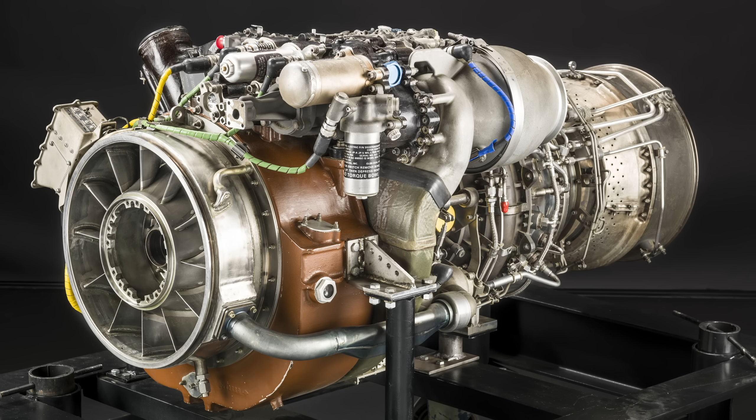The General Electric T700 is arguably the most successful turboshaft engine ever created. It powers a variety of helicopters like the UH-60 Black Hawk, the AH-1Z Viper, and AH-64 Apache, among about a dozen more aircraft types, with the most advanced variants like the CT7-8A7 producing up to 3,000 shaft horsepower.

We're going to examine this engine's design and some of its unique features that allow it to operate in dust, sand and snow with minimal performance loss or damage, and reveal why this engine is still relevant today, more than 50 years after it was first run.

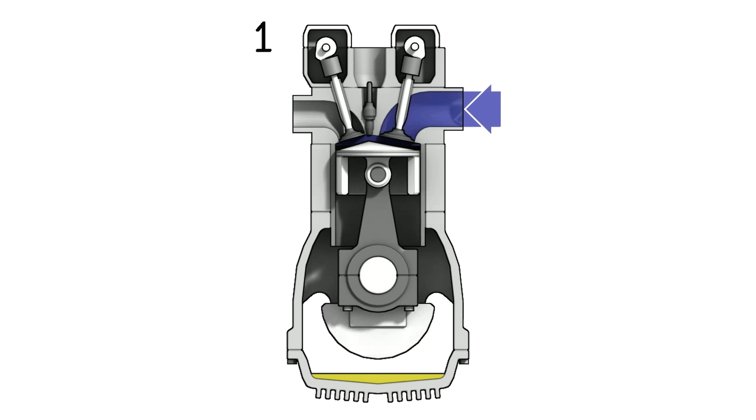Before getting to the T700's design, let's do a quick recap of what a turboshaft engine is and how it works. Understanding this standard design will help emphasize the advanced features of the T700. Like a piston engine, the turboshaft has 4 phases: intake, compression, combustion, and exhaust. Each phase happens in its own section of the engine.

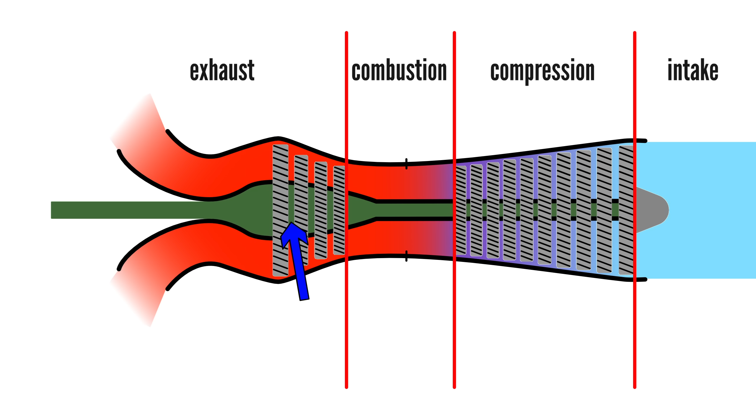Air is drawn in from the front by the compressor rotors. The air is pressurized, which heats it, then fed to the combustion chamber where fuel is added and ignited. As the hot, rapidly expanding gases exit, it spins a turbine. The turbine spins the compressor to keep the cycle going, but also drives the output shaft, which through a series of reduction gears spins the helicopter's rotors.

While I think my extremely high-tech and immersive 2D graphics do an okay job at helping visualize concepts, at times like this I often wish I had a real engine with me here to reference.

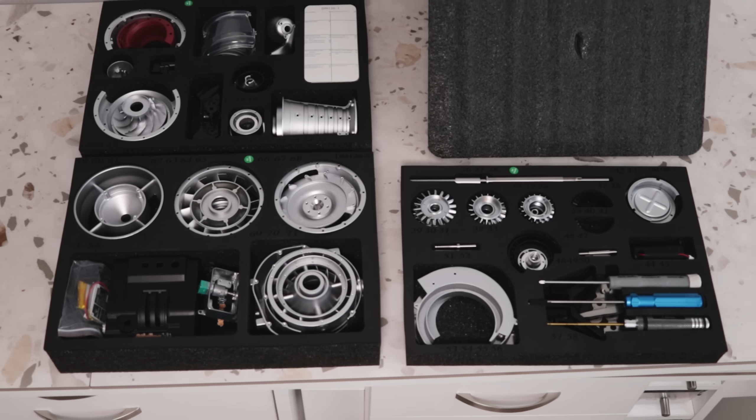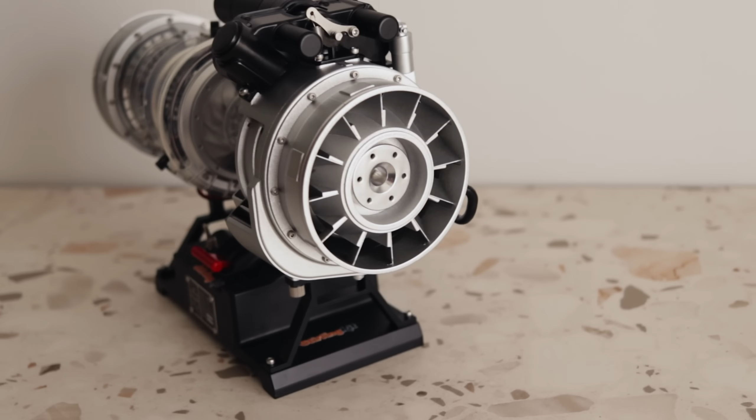So, looking here, you'll see several things not captured by my previous 2D illustration. Starting at the compression stage, you can't see the rotors looking in from the front thanks to something very interesting at the intake, which we'll get back to in a bit.

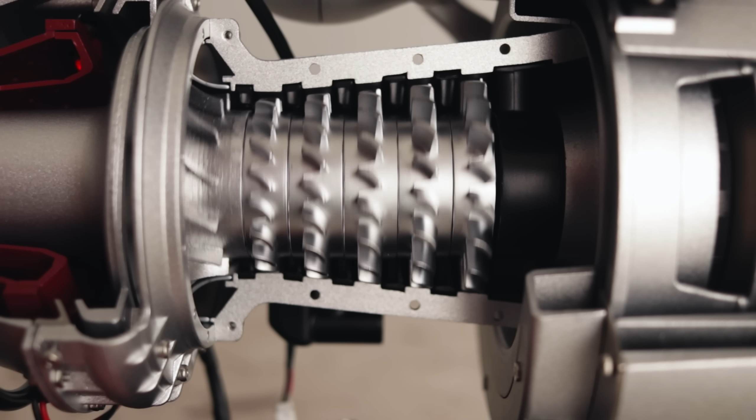Before air enters the compressor, it goes through a variable inlet guide vane, or VIGV for short. This controls how air enters the compressor and helps the engine adapt to different operating conditions. Air then enters the compressor, and the T700 has 6 stages of compression, with each rotor counting as one stage. The overall pressure ratio is 17:1.

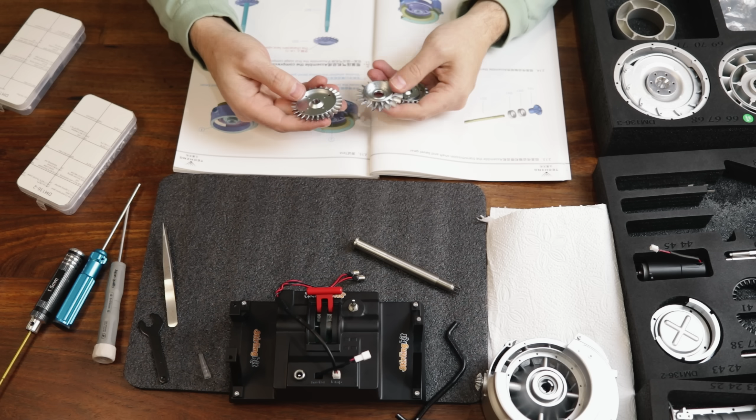Each stage compresses the air a bit more and moves it axially, that is, this way. These rotors are one-piece blisk rotors, exactly like shown here, meaning the blades aren't attached separately. The entire rotor is constructed as a single piece.

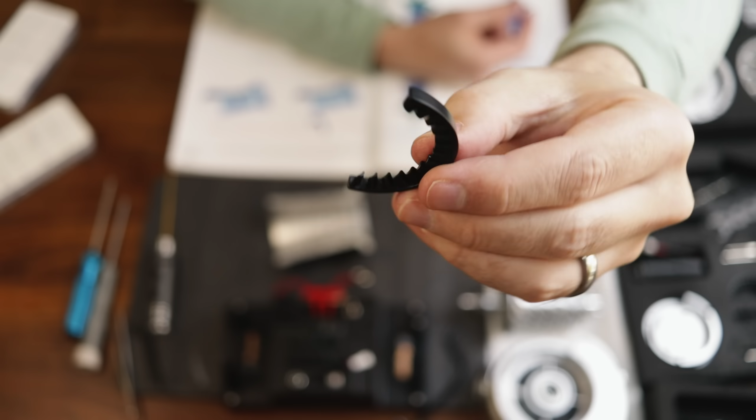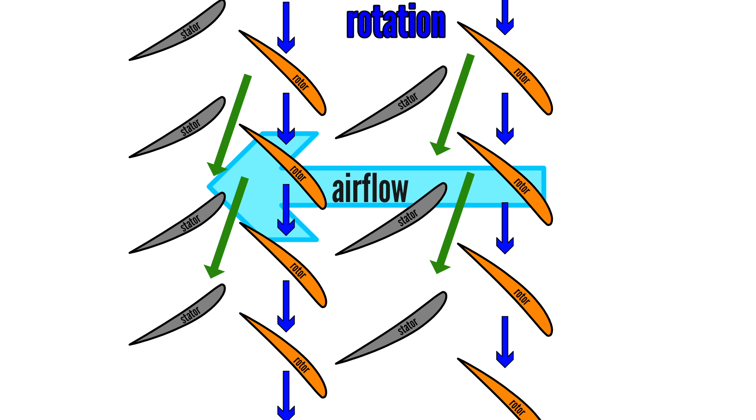In between these spinning rotors, we have variable stator vanes, which are fixed to the casing and don't spin. The purpose of the stator vanes is to adapt to changing airflow conditions, and the blade angles are changed via an actuator shaft. This assists with more efficient compression, with the rotors adding energy and the stators modifying the airflow for the next rotor stage.

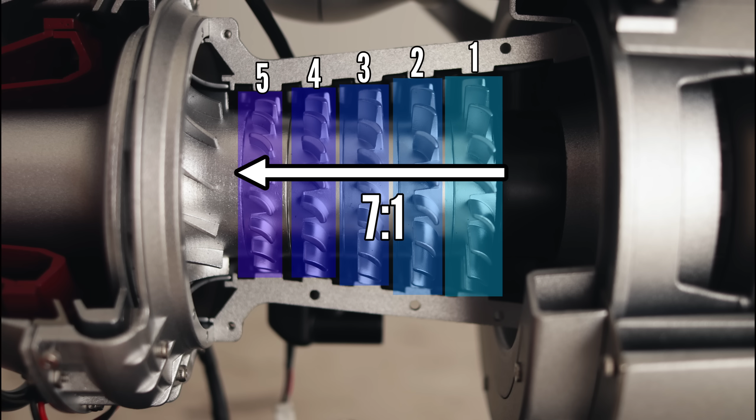This is called an axial compressor, and the 5 axial stages account for a 7:1 pressure ratio. But you'll have counted only 5 rotors, and I said this is a 6-stage compressor. That's because the 6th and final stage of compression uses a centrifugal compressor, a design not much different from what you'll find in your car's turbocharger.

This is an impeller with curved blades that, as it rotates, accelerates air outward through centrifugal force, further pressurizing the air before it enters the combustion chamber. It brings the total pressure ratio up to 17:1, meaning the centrifugal stage alone contributes a 2.43:1 pressure ratio increase.

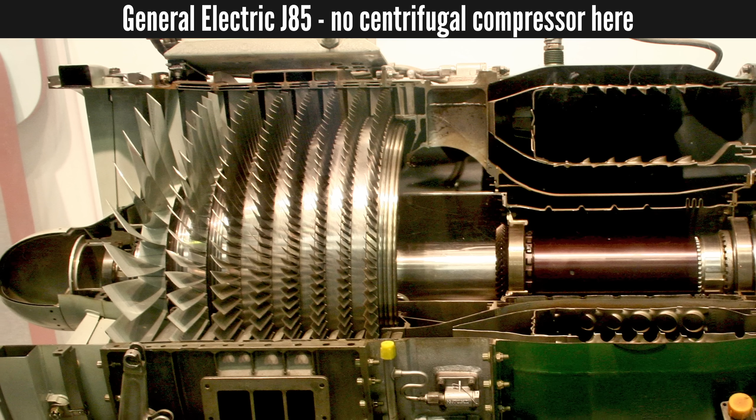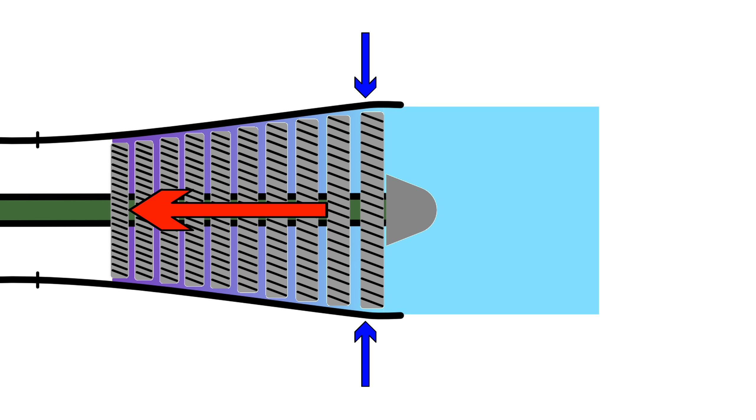Not all gas turbines use centrifugal compressors, since axial compressors can handle higher air mass flow rates, have a smaller frontal area, and can achieve higher overall pressure ratios, making them more efficient. So why does the T700 use 5 stages of axial compression followed by 1 stage of centrifugal compression?

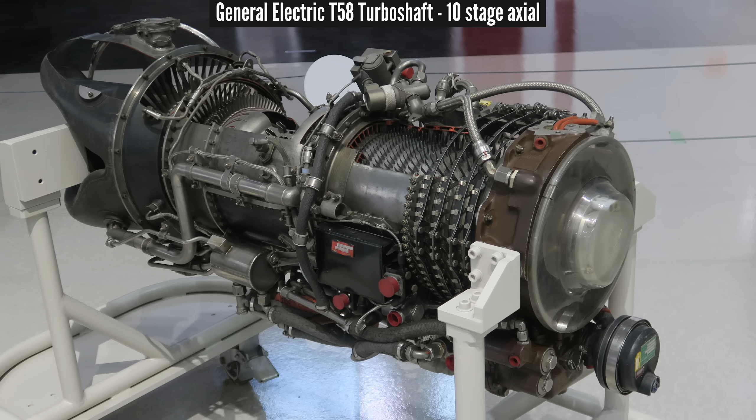Simply put, to get the best features of both. Even though axial compressors can achieve higher pressure ratios, they achieve less pressure increase per stage, meaning they usually need at least 10 stages, making the engine very long.

So instead of using 10 plus stages of axial compression, combining 5 axial stages with 1 centrifugal stage makes the engine much shorter. Critically important for the helicopters it powers, while also bumping total pressure ratio up to 17:1.

It's also worth noting that centrifugal compressors handle power surges better than axial compressors. Keeping some stages axial maintains better overall efficiency, since using only centrifugal compressors would drastically lower efficiency.

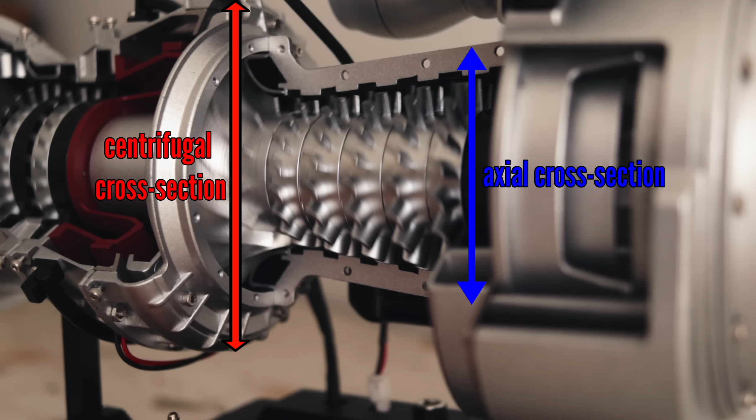Another disadvantage of centrifugal compressors is their large cross-sectional area. But since helicopter engines are usually at least partially hidden in the fuselage and don't create a critical drag penalty, this larger cross-section is less of a disadvantage.

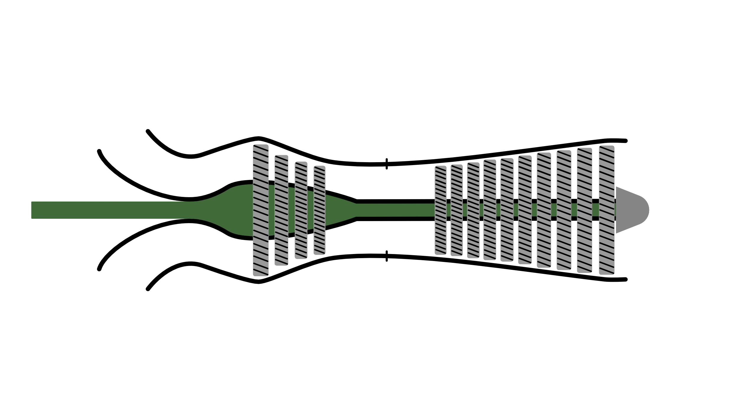Because of the centrifugal compressor, air doesn't just flow straight rearwards into the combustion chamber like in conventional designs. Instead, the T700 uses a reverse flow annular combustor. Air flows outward from the centrifugal compressor, makes a U-turn inwards, then flows around the outside of the combustor and enters the combustion chamber through the diffuser holes where fuel is added and ignited. The hot gases then exit rearwards towards the turbines.

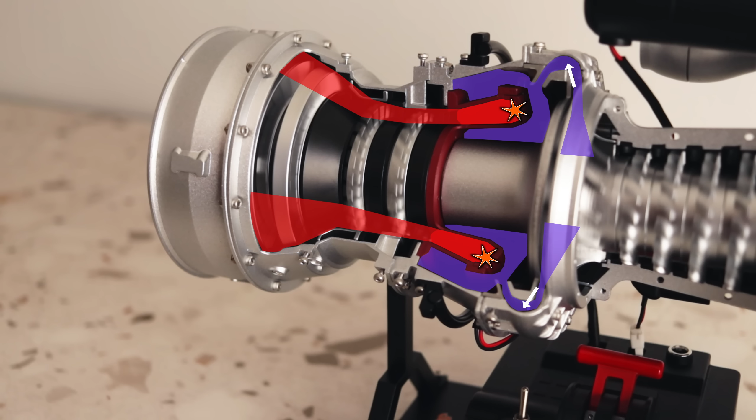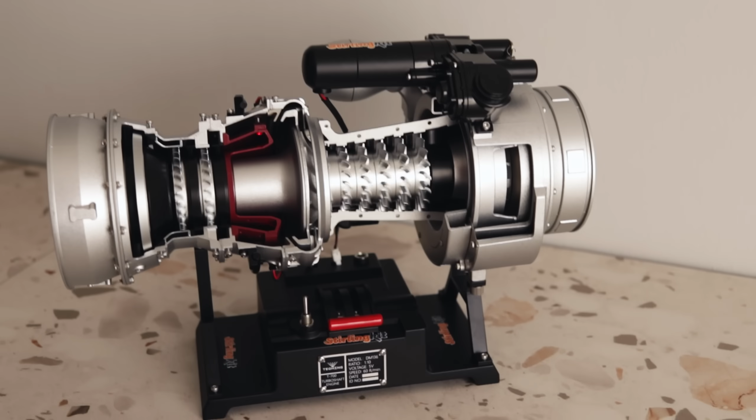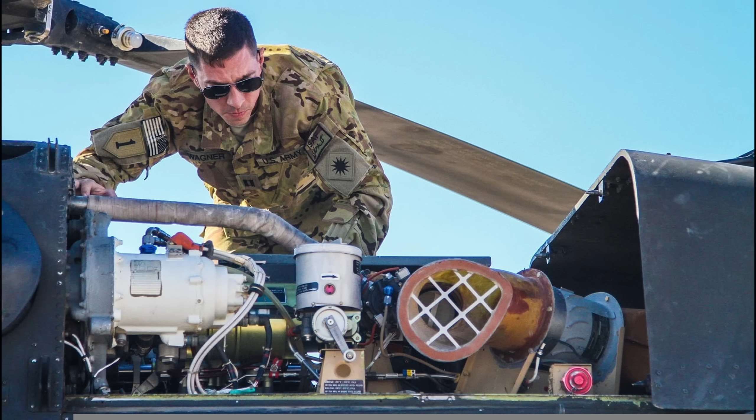This curved path does more than just redirect airflow. Air exiting the centrifugal compressor is moving fast and needs to be slowed down before combustion, otherwise you'd get poor fuel mixing and potentially flame blowout. The reverse flow design naturally diffuses and slows the air as it curves around, creating ideal conditions for stable, efficient combustion. This design not only allows for a more compact engine, but enables a modular construction where major sections can be removed and serviced independently, making maintenance in the field much easier.

After combustion, the energy-rich hot gases expand rearward and spin the turbines, and you'll notice there are 4 of them. It's a free turbine system, meaning they aren't all mechanically connected. The first 2 turbine stages make up the gas generator turbine, which drives both the axial compressor stages and the centrifugal compressor. The rear 2 stages form the power turbine, which spins the output shaft that drives the helicopter rotors.

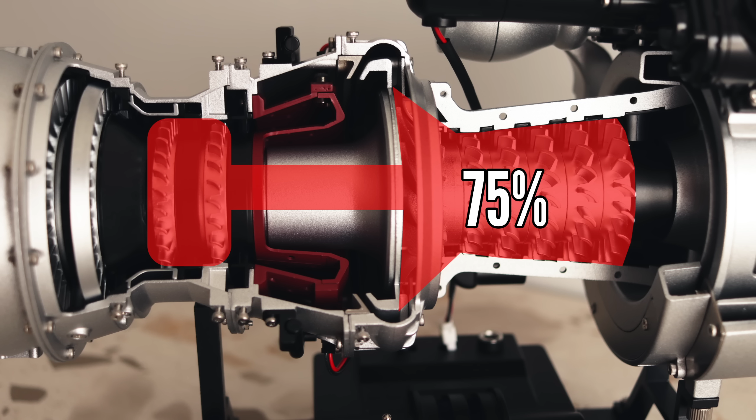The gas generator turbine uses about 75% of the total combustion energy to drive the compressors, while the remaining energy drives the 2-stage power turbine to turn the rotors.

This configuration isn't exclusive to the T700. Many turboshaft engines use it, but plenty of other engines connect the turbine directly to both the compressor and the output shaft. The free turbine system has several key advantages.

The most important is that each section can run at independent, optimal speeds. By having the gas generator spin at its optimum RPM, the engine is more efficient.

But it also provides several operational advantages, like surge protection, so sudden load changes only affect the power turbine, not the gas generator. It also enables better auto-rotation capabilities, which is done during emergency landings, since the power turbine can rotate freely without having to drive the gas generator.

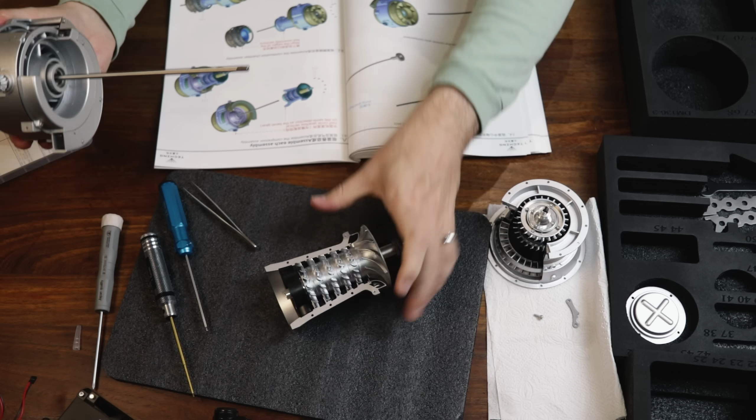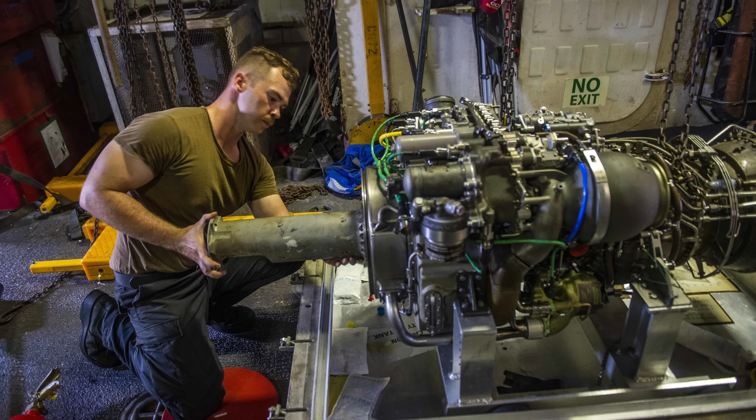It also enables a highly modular design, which is one of the T700's standout features. This increases maintenance access and reduces maintenance time, as major sections can be completely removed without having to remove the entire engine. Since most T700 applications are military, this provides massive benefits.

The power turbine can also be fully replaced without having to change the whole engine. This dramatically reduces downtime and improves fleet readiness in combat zones. The trade-offs are slightly reduced efficiency due to losses between turbine sections, increased weight, more complex exhaust ducting, and higher manufacturing cost.

Let's now jump back to the intake section and discuss a unique feature of the T700.

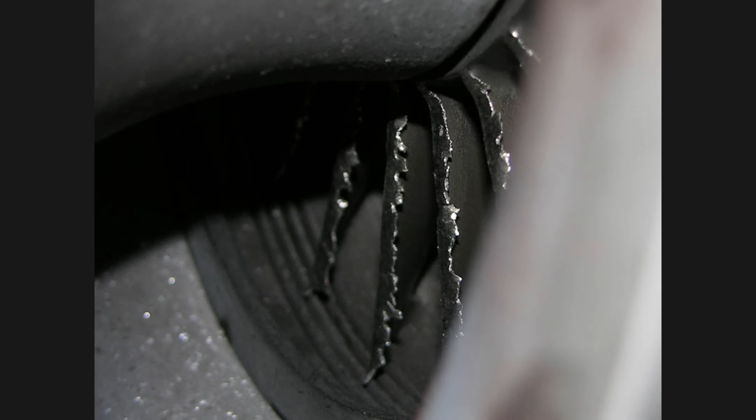The first compressor stage is axial, which has several rotors and stators and is more efficient than centrifugal compressors. But axial compressors are more sensitive to foreign object damage. With military helicopter applications operating in combat zones, this is a significant drawback as it increases maintenance requirements and failure rates.

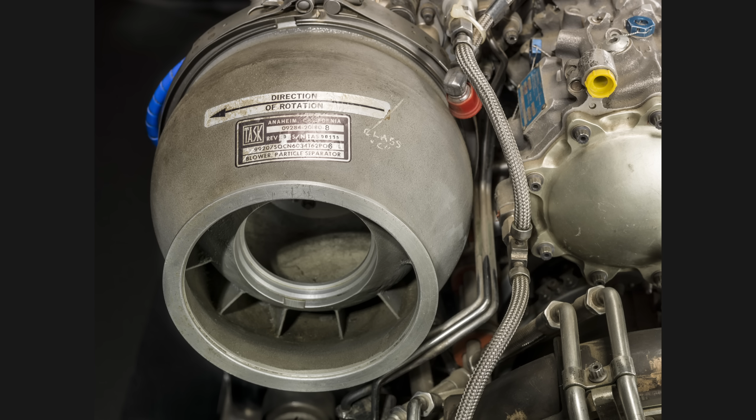But General Electric came up with an innovative solution called an IPS, or Integral Particle Separator System. Air enters at what's called the swirl frame.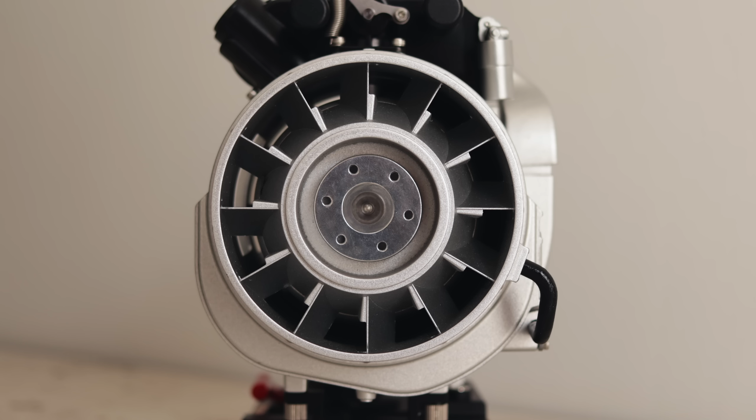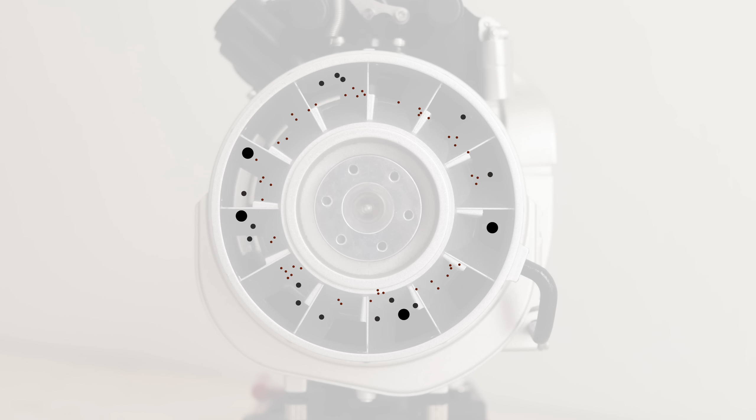This isn't a rotor, it's stationary with blades called swirl vanes. Its purpose is to swirl the incoming air in a helical pattern, like a tornado. This creates centrifugal force and separates heavier particles like sand, ice, snow or debris from the lighter air. The centrifugal force throws the heavy particles outward while the clean air stays towards the center where it supplies the engine.

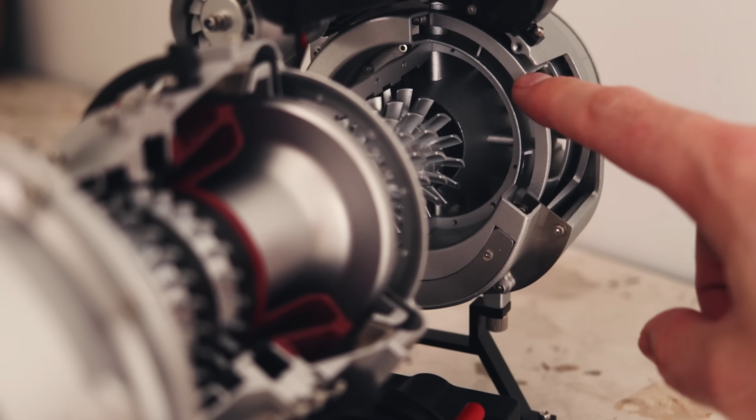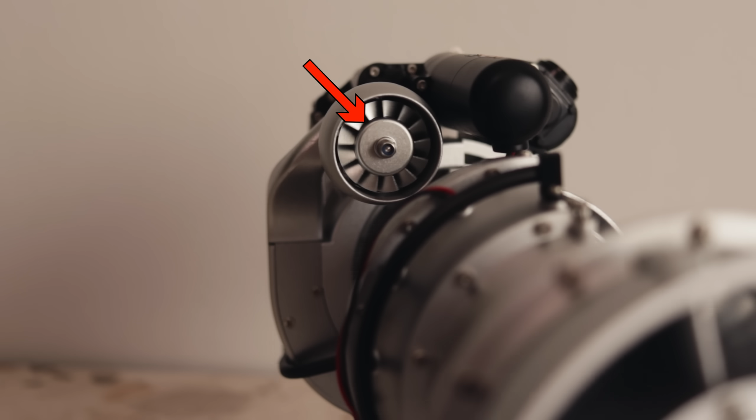It's kind of like swirling a marble around in a glass. The heavy marble gets pushed outward while the center is just clean air. The debris that gets flung outward is then extracted through a duct by suction created by a small, mechanically driven scavenge blower and expelled from the engine. At maximum power, this blower extracts about 15% of the total inlet airflow.

So rather than using just simple filters or screens, the T700 uses a sophisticated air pre-cleaner. And this isn't just theoretical. During qualification testing, a T700 ingested approximately 35 kilograms of sand over 58 hours at maximum continuous power without significant power loss or engine damage.

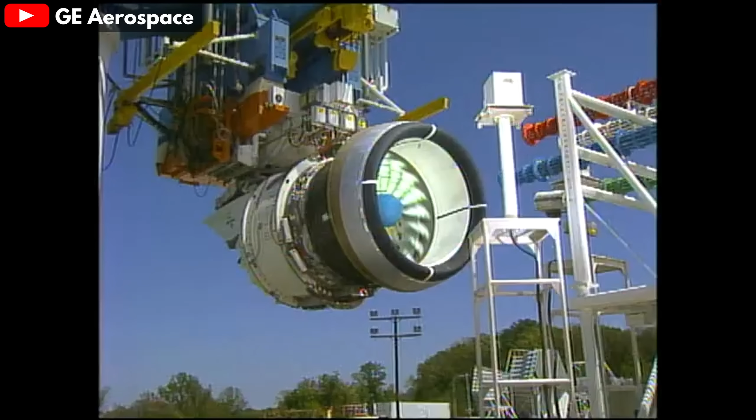Taking it even further, 138 random objects like nuts, bolts and sockets were fed into the intake, and the IPS system separated 93% of these objects. I don't know about you, but feeding random solid objects into a turboshaft engine to see if it survives pretty much sounds like my dream job.

Before I conclude with some final thoughts, let's quickly discuss the T700 model I've been using throughout this video.

The kit arrived within 7 business days, well packaged and protected against shipping damage. Mine took a big hit, which put a hole in the outer box, but the inner kit box was perfectly safe thanks to bubble wrap protection.

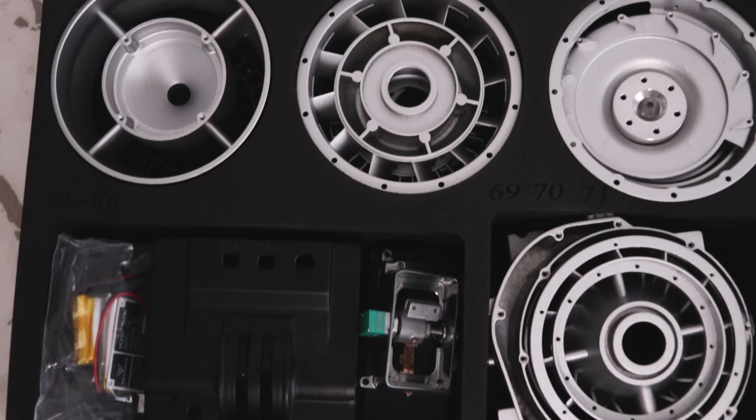All required tools are included. I only reached for my own long nose pliers once, but it wasn't strictly required. Surprisingly, most engine parts are metal with just a few plastic components, resulting in a satisfyingly heavy finished model.

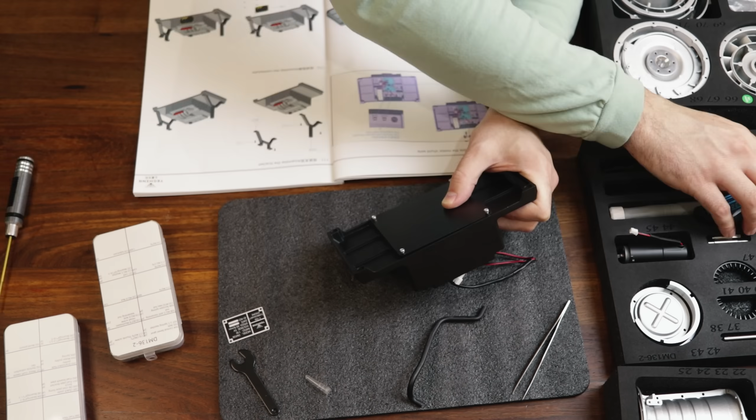Assembly took about a full day, though I did other things in between, and I'm definitely not fast at this type of thing. Even a pre-flight inspection takes me ages to finish, at the complete disgust of anyone flying with me. The instructions are clear enough that if I can do it, most people can.

Some sections could be improved, particularly the electronics portion, but it was simple enough to figure out. I don't think I had any real difficulty during the assembly process, other than perhaps the fuel rail and injectors, which seemed overly finicky to fit.

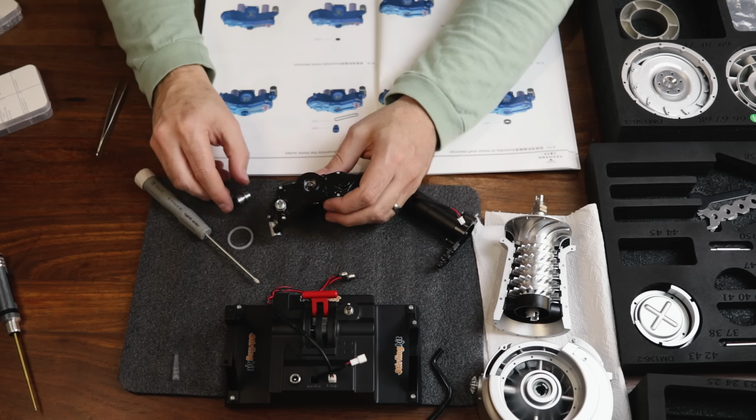Building it component by component genuinely helps you understand this engine. Challenge yourself to identify every component and its function on the actual engine as you assemble it. It's a great test of your turboshaft engine knowledge.

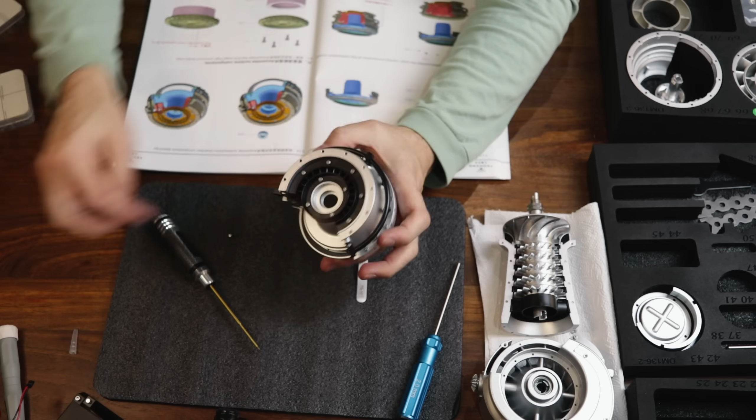Overall accuracy is hard to assess since there are many T700 variants, but one area I'm unsure about is the gas turbine section. It spins in the correct direction, but has blades oriented like compressor blades rather than turbine blades. Compressor blades are oriented convex side forwards, facing the incoming air, and turbine blades have its concave side facing forwards.

It was genuinely fun to build and looks quite good. It'll probably have a permanent spot on the shelf behind me in future videos.

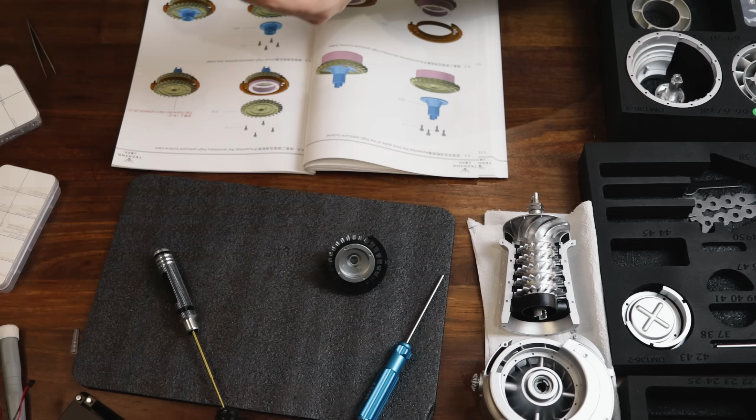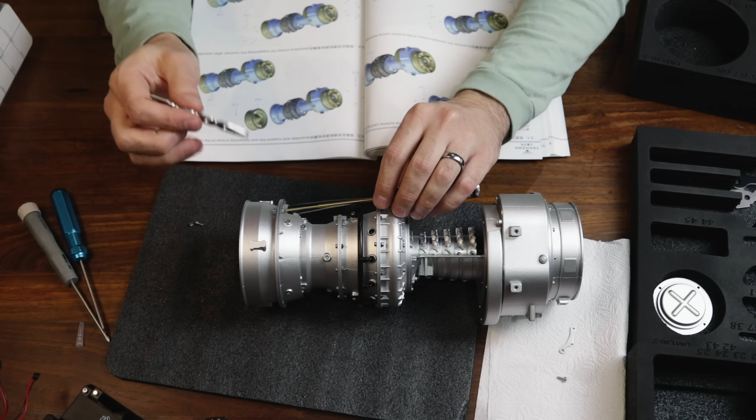So, who is it for? Hobbyists, engine model collectors and students wanting to learn more about turboshaft operation. It's perfect for somebody like me who cares more about understanding overall operation and main components than absolute accuracy in every detail. I wouldn't recommend it for engineering professionals who need a 100% accurate scale model.

Now, let's get back to the real T700.

Development of the T700 started in the late 1960s, evolving directly from the challenging operating conditions experienced in Vietnam. More than 25,000 T700s have been built so far, and beyond the dozen military helicopters it powers, it also drives fixed-wing aircraft like the Saab 340 in its turboprop CT7 version, as well as civilian helicopters like the Bell 214ST. The T700 is still in production today, with new and improved variants continuing to be developed.

However, by the mid-2000s, the Improved Turbine Engine Program was launched to find a replacement for the T700, which General Electric won with their T901 submission in 2019.